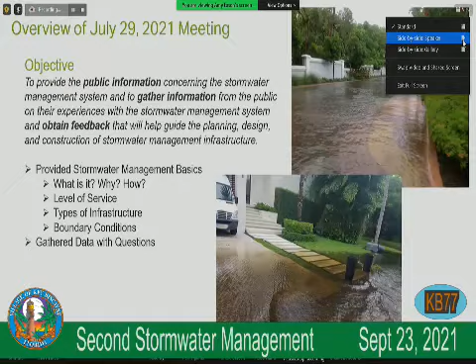He went over an overview of our first meeting, basically held July 29th. It was a public information meeting. We went into what stormwater is, why we're looking at stormwater, and how. We gathered some information from you as part of the survey, and then we obtained that feedback. All this information will help us determine the design criteria moving forward, so the public understands what the level of service is for the system.

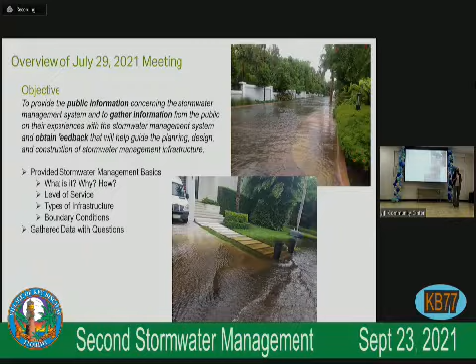There were about 53 attendees at the July 29th meeting. We had 24 via Zoom and 29 in person, and we had 120 people respond to the survey. So that was pretty good.

So today we're going to present those results to you in a way so that you can understand why we asked those questions, how they guide decisions as we move forward with the stormwater system. Then we're going to tell you what that means for the next steps, which Roland already went over.

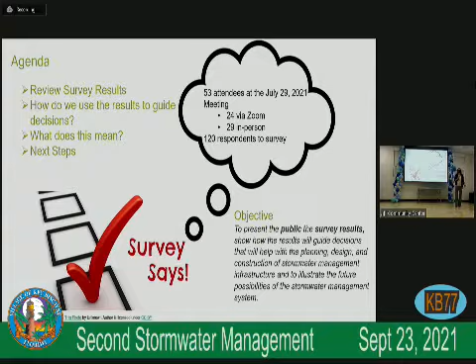The first set of survey questions really dealt with flood tolerance: how often do we see flooding, how high is the flooding, how long does the flooding occur, and what is your tolerance?

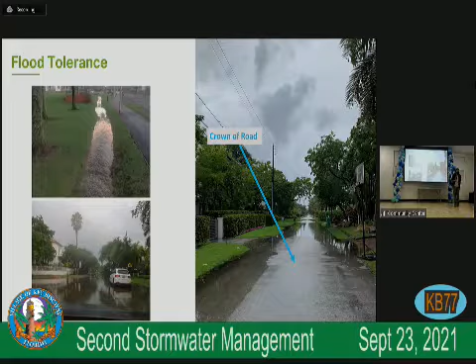The first question was basically, how often does roadway flooding occur or impact your daily routine? The majority said 1 to 10 times a year. About 8% said no impact whatsoever. This helps guide us into understanding the rainfall events that actually impact your system.

The third question is, what's your tolerance for flooding? The majority basically prefer no flooding, but can tolerate some flooding into swales, which is really good guidance for us, because swales, as I tell my other clients, are your friends. They're good for storage, good for water quality, and allow the village to utilize some of that right-of-way to have swales.

The next series of questions had to do with public rights-of-way and private lots. The reason we asked those questions is a lot of the public infrastructure, like stormwater, water, and sewer, are within those right-of-ways, and a lot of residents and property owners don't understand where that line is.

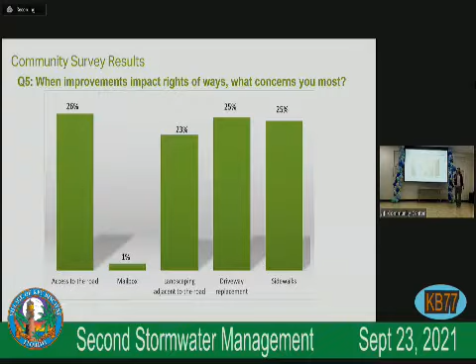The fifth question is, when it comes to improvements that impact the right-of-way, what most concerns you? It's a pretty even playing field—not very many people care about their mailbox, which I thought was interesting. But everything else within the right-of-way, like access to road which helps us with construction, landscaping adjacent to the road, driveway replacement, and sidewalks, matters. We understand that we have to really take into consideration those facilities that are next to properties.

The next question was about upgrading the storm system, and this has more to do with seawalls and what kind of modifications you find most acceptable. The majority are in favor of raising the seawalls when we renew or update those outfalls. The public basically wants to see the seawalls raised, and you'll see in the rest of the questions that seawalls and sea level rise are definitely important.

And this is important to help guide policy, because when outfalls are being repaired, you're going to see this raised seawall right at the outfall, but we have a lot of private side seawall that's going to be adjacent to that. And how do we address those problems?

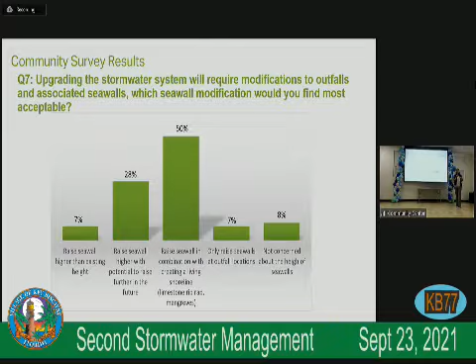Next series of questions has to deal with climate change. So when it comes to climate change, which items concern you most? And the majority is sea level rise.

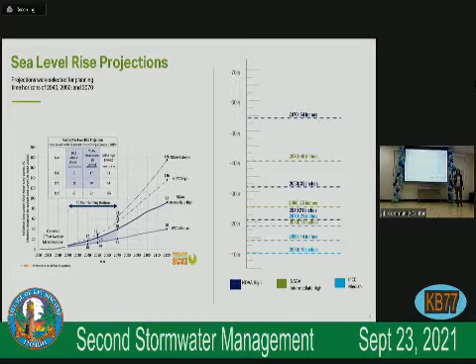And this will lead us to the next question, which has to do with sea level rise projections. Last meeting, we talked about a low projection versus a medium projection and a high projection. And the survey results were basically, let's really look at that medium and high projection as we're planning public infrastructure.

And as we're designing that public infrastructure, we have to consider the life of that public infrastructure. And typically for stormwater, it's 30 years. So we'll take that into consideration as we choose which projection to use, as well as cost. Because if we have to go with a higher projection for design, that's going to increase the cost for the project.

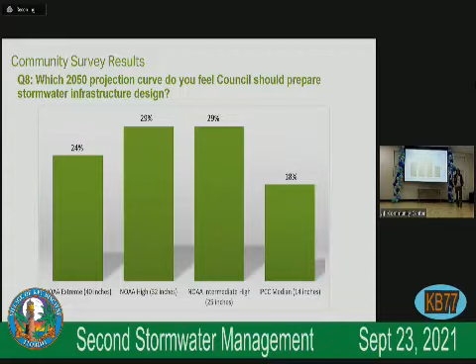All right, so the next series of questions has to do with the public infrastructure and what can we use.

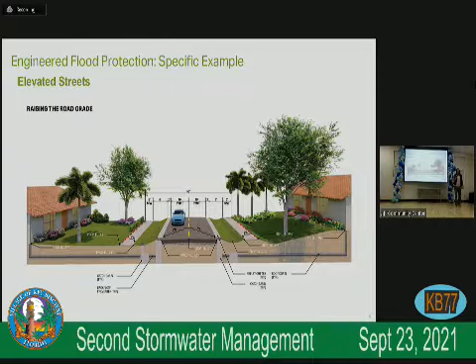So when looking at elevating roadways to address flooding and reduce the number of pump stations, for the majority of you don't really want to see the roads raised, but I would say this is about a flat line. It's almost like 50-50.

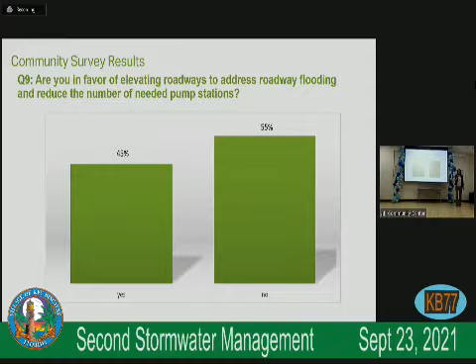And then are you in favor of elevating the roads in combination and making some roadways one way to expand the area for green infrastructure?

Majority says yes. I think we love our green infrastructure. We recognize that we need it for storage. We recognize that we need it for water quality. And a one-way road is an option for us when it comes to design.

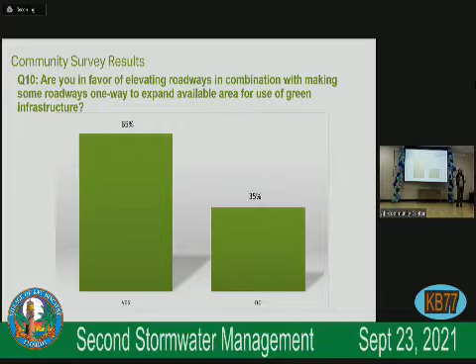And then this question is if elevating the roads occurs adjacent to your property, what are you concerned with? And most of it was property drainage. Yes, when we raise a road, we got to consider how we're going to drain the property.

Another thing that we have to think about is the floor to area ratio when it comes to buildings, because some properties could then play with that, add more storage on site, which then reduces the impact to the system that could potentially reduce the amount of cost in the system.

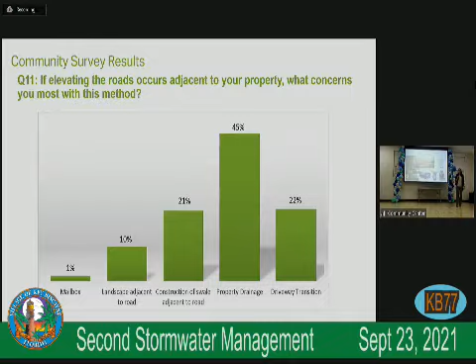Next series of questions is about water quality treatment. We talked about nature-based solutions versus gray solutions. First part is the nature-based solutions. Which one do you prefer? The majority like the rain gardens. They're pretty, they have vegetation in it, they provide storage, they provide water.

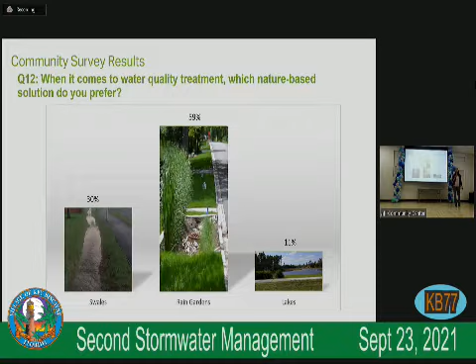When it comes to water quality treatment, are we okay to use gray? The majority says yes. And those, if you remember, are those solutions that are in line with the storm system. So you may see a water quality separator next to a pump station, stay in line. It can also be in with the catch basins.

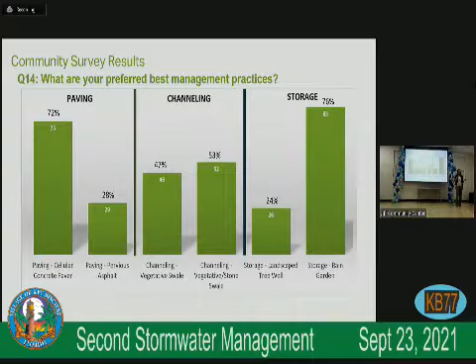And then the last item with the solutions, the green infrastructure solutions, we gave you some selections on paving. The first one was talking about what kind of paving would you prefer. The majority of you like the cellular concrete pavers. When it came to channeling, it's about equal. So we're good with the additional storage, but we prefer the stone.

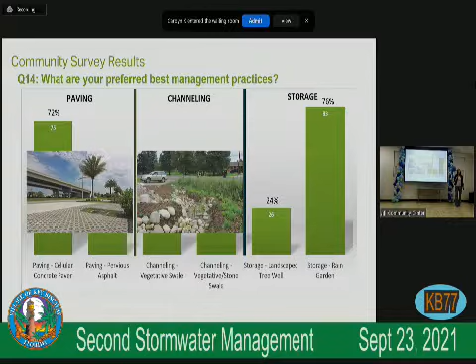And then for storage, again, rain gardens win. 76% like the rain gardens, and so these are items that will guide us into the design decisions.

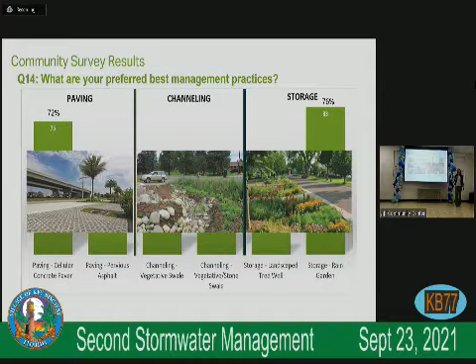And last survey results was what is most important to you, and it's not surprising to see these results. The first one is basically risk to property. That is definitely the majority, and then second up is how are we going to fund it, and then sea level. So right now, I'll take a little pause if anybody's got any questions on the survey results.

Yeah, I think one of the elements that's really important is the funding, because I think people's decisions would be different, since some of the questions don't have the cost basis in them. Maybe nobody wants any flooding, but if that costs $2 billion versus having 4 hours of water that costs whatever $30 million, that's a big difference.

So I guess that may be when council starts looking at the different options. Are you guys going to look at different levels of service and tell us what the difference in price would be if you could see different levels? I don't have enough of that detailed analysis to be able to tell you that.

What I can tell you is, definitely when you go with a higher projection, that's going to increase your cost because you need bigger infrastructure to push against the water that's coming out. So the higher the water, you're going to have to deal with that. Raising roads, although there's a cost to that, there's a benefit that you could reduce the pump station or the bigger size pipes that you may need to build.

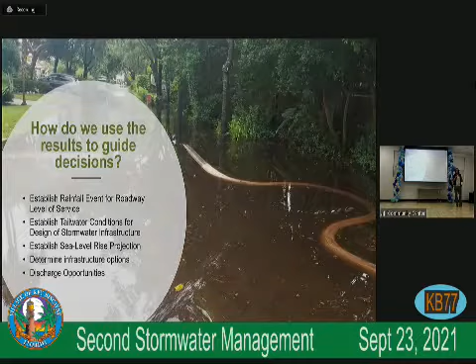All right, the next series of our meeting is to explain how we're going to use these results to help guide decisions. We're going to go over rainfall events with level of service, establishing that tailwater condition, which is the elevation of Biscayne Bay that we want to design our infrastructure to, which then ties into sea level rise, and how much higher we need to design our infrastructure for. Establishing and looking at different infrastructure options, and also a discharge opportunity, looking at where the village's deficits are, where we can improve, and how much more we need to do.

So the first one is establishing rainfall events for roadway level of service. So when I go back to level of service, when a rain event occurs and it's 3 inches, and that road is designed for a 3-inch rainfall in 24 hours, there's no flood. So that's an expected level of service.

So we know that the village gets 55.4 inches a year. Over the past 3 years, the village has been collecting rainfall data, and the maximum daily rainfall they've received is 3.5 inches in a 24-hour period. NOAA said they had about 5.44 inches in the area, so there's a bit of a difference there.

When we were looking at the survey results, we noticed that 55% of the landowners said that it impacts them 1 to 10 times a year, and 64% are mostly concerned about roadway flooding. So for a level of service, we have to look at something the residents and the public understand: the road should not flood during X storm.

When looking at daily rainfall, Miami-Dade County standards and South Florida Water Management require no flooding of the crown of the road - meaning the center line, the highest part - for a 5-year, 24-hour event, which happens to be 6.54 inches. So if the village decides to move forward with that same level of service, consistent with the area, you may entertain that, knowing what kind of rainfall you get during the year.

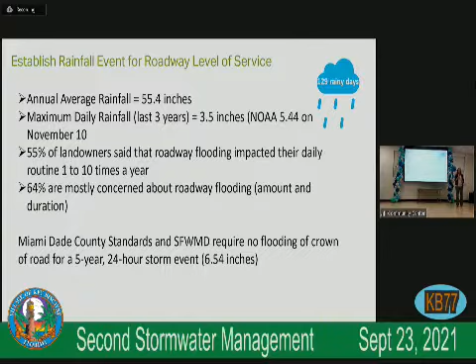The next design criteria is establishing the tailwater condition - what elevation of Biscayne Bay do I need to worry about when designing the stormwater infrastructure? The Southeast Climate Compact recommends a mean high water of 0.15 feet NAVD, and the most recent king tide was 2.18 feet NAVD. Taking the tides and historical information into account, our recommended starting point is 2.07 feet NAVD. You've already put a lot of infrastructure in for tide flex valves to keep that water from coming in, but this gives us the starting point for our design.

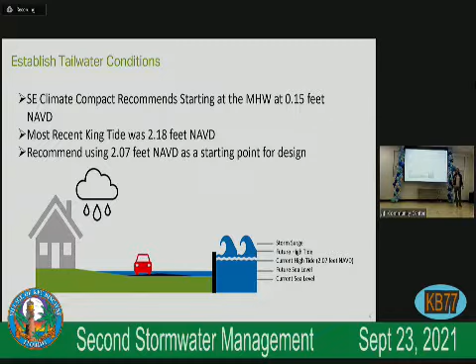Then we have to take into account sea level rise projections on top of that. Looking at the survey results, they're about 50-50 on using the NOAA high versus the NOAA intermediate high - that's 32 inches versus 25 inches, for a 2050 projection. So if we have a 30-year lifespan on our stormwater infrastructure, we would use that projection.

The Southeast Florida Climate Compact recommends using the intermediate high, which is 25 inches in 2050, so we would recommend using the same intermediate high. But if the village decides to go with the higher projection, just keep in mind the cost will increase as we utilize higher projections.

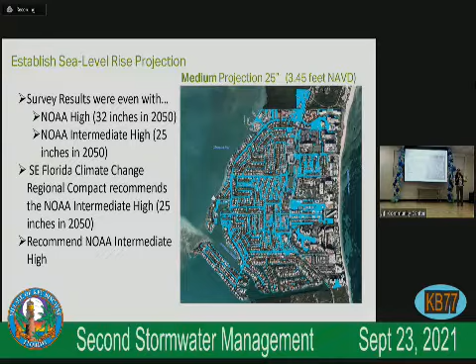The next type of infrastructure to look at is seawalls. When it comes to repairing the seawalls and modifying those outfalls, the majority of you wanted raising the seawall to accommodate the future projections, and also the majority liked the living shoreline. The picture on the bottom is an example of a living shoreline next to a seawall, and the one on top shows the difference of raising the seawall to an appropriate elevation.

Remember that Miami just passed an ordinance to be at 6 feet NAVD, and Miami Beach is at 5.7 feet NAVD. I understand the village is also entertaining looking at raising seawalls.

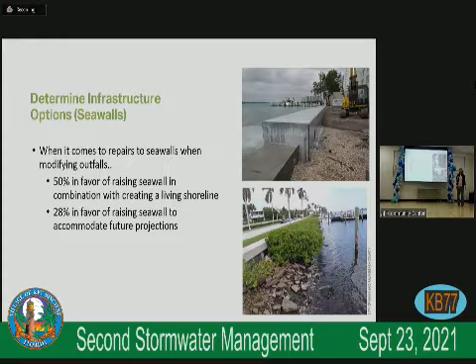We talked about raising roads. We saw there was a slight majority not in favor of raising roads, but you also said if we have to raise roads, we want to utilize it for green infrastructure. When we raise roads, property drainage is an issue, but it's something that can be mitigated - we can go with backflow preventers to the houses, implement more green infrastructure, more storage. There's ways we can make this work, and it helps reduce the cost of the stormwater system if you're able to raise those roads.

Okay, so we're going to pause here. Two questions.

The purpose of the seawall - because the problem we have here is the water percolates from the bottom - so is the purpose of the seawall, since you're raising everything else, the shoreline as high as all the construction that's coming forward, because it's not going to stop any of the water? What is your thinking?

So yeah, there's two things. With the seawalls, if we don't raise them, the whole purpose of doing the stormwater system becomes a moot point, because you're going to have water coming in from the bay. It's going to screw up your piping and catch basins, because there's no way to keep it out. So you have the seawalls coming up. Depending on the ground elevation next to the seawalls, we know groundwater will rise as well, which will diminish some of the storage within the system. So it's definitely something we have to consider when raising a seawall.

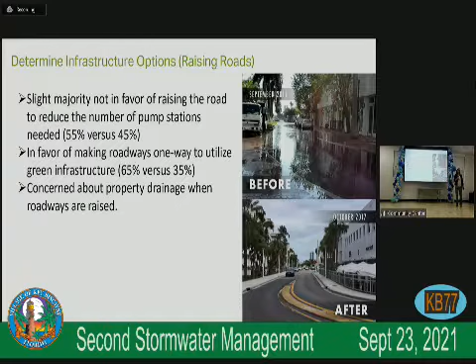Any other questions? All right, the fun part.

Part of our task order is to look at discharge opportunities. That means looking at the existing outfalls the village has, how big those easements are, and what room we have in those easements to put bigger pipes and bigger infrastructure. Then we establish, if I have an existing flow going out, and look at what I could potentially put out, how far am I behind the 8 ball when it comes to level of service. A typical rule of thumb to meet a level of service of no flooding is about 3 CFS discharge, cubic feet per second per acre, for an area.

We've used this in Miami Beach, I've used it in Naples, and actually I did the analysis in Naples and found it needs that 3 CFS, so it's kind of like a check. So we use 3 CFS per acre to meet a level of service of no flooding. Then we determined what the shortfalls were, and proposed what kind of facilities would help get you to where you need to be.

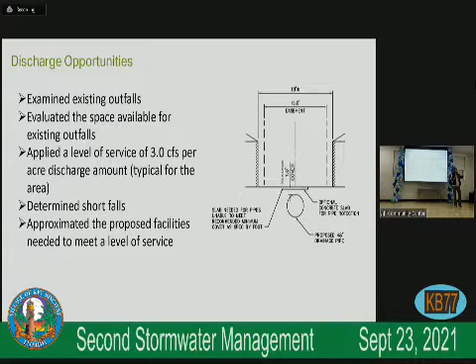Looking at the existing capacity versus the proposed capacity, the basins you have, and the acreage, which is about 800 acres, we found that for existing discharge capacity, with your existing easements and pipe sizes, and taking into account the low elevation to push the water west, you're at about 210 CFS. Using the rounded number of 3 CFS per acre, you would need about 2,380 CFS. So you're already at a deficit of 2,171 CFS, meaning that's how much more infrastructure we'll need to get that water out, whether by increasing pipe sizes or adding pump stations. This is what we came up with for level of service.

So are there any other questions on this? Because this is going to be... yes.

What we're seeking in the future is about, and that's a rule of thumb. Now granted, it's all dependent on the level of service you decide. So if you decide no flooding of roads, that's 3 CFS - I've noticed from experience that 3 CFS handles like a 10-year 24-hour storm. If you decide to do the 5-year 24-hour storm, that's actually 2.5 CFS per acre, so it gives you a little less for the infrastructure, but it depends on level of service. This is just based off a rule of thumb that I use. But if council decides they can do a lesser level of service, that actually helps determine what that is, and the cost.

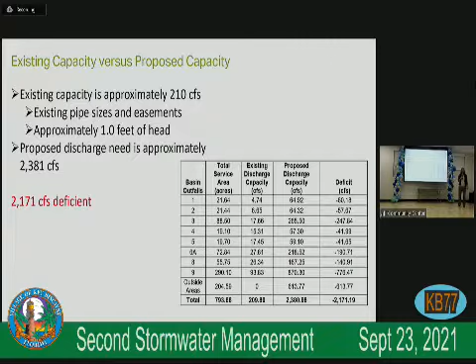Any other questions? All right, that's fine. Is your mind blown? Yeah, pretty blown.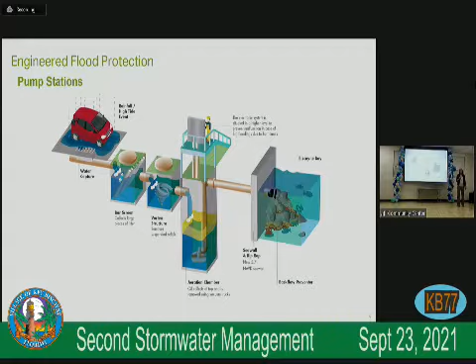All right, so what are some of those solutions that we can use? You've heard me talk about pump stations. Pump stations typically have some sort of water inline gray infrastructure - water quality infrastructure, whether it's a bar screen or a vortex, looking at removing nutrients and removing trash. The pump station pumps into Biscayne Bay because the water elevation is higher. You can consider small pump stations, similar to what the gentleman here was implying. So in Miami Beach, that's Alton Road - that pump station is within the road, has 2 pumps in it. As you can see underneath, there's the electrical panel for the pump station.

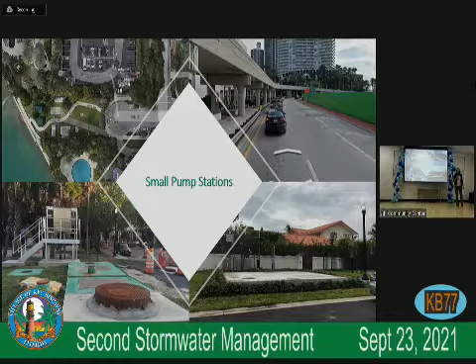And here's another pump station you could have - that's a smaller one. Typically these small pump stations are like a sewer station, so it's a manhole with 2 pumps in it, or 1 pump contained within the manhole. Then you have the water quality structures right prior in line with it. And of course we have to consider with any of these facilities what's called a dissipator box, so we can reduce the speed of the water, so we're not creating turbidity and not eroding the Biscayne Bay or affecting the integrity of the seawalls.

We also looked at large pump stations - this is an example of one as well. You see the big box here, the electric panel, and over to the right you can see how you can hide those things, because a lot of times the public is interested in how you're going to hide that infrastructure so it's not an eyesore. And like I said, they're bigger boxes - they can consist of 4 to 6 pumps, and they have water quality structures as well. And this box may consider using more of the seawall, so we could slow down that energy level.

I know you can't see this, but we took all that information - we looked at the existing discharge. Oh sorry, so we calculated the existing discharge. We looked at...

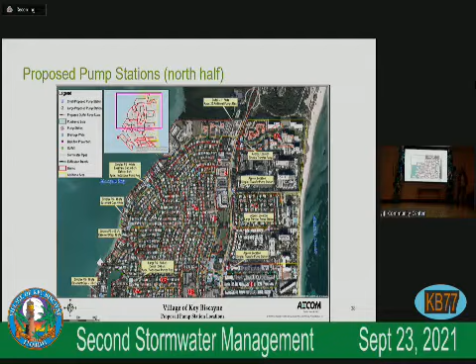How big are those easements? They did range from like 8 feet to 20 feet, I think. And we took a look at those easements and decided, okay, what size pipe can we put in it? Where can we put it? So this is a picture of all the existing outfalls that you guys have that we could utilize for pump stations. We also looked at transfer pump stations, because we're not going to be able to go all from the east to the west, and where we could have those opportunities. And what we found, even doing this - these are assumptions - we're assuming that the pumps can do like 20,000 gallons per minute.

Just making that assumption. Now, depending on the design and all that, we may get more flow, we may get less flow, depending on the location, how much head differential, how much head we have to go through Biscayne Bay. And even doing all this, we came up with, yes, here, there.

Well, now we're at the end of the presentation.

No. So even by looking at your available room, we still found that we were in a deficit. So even doing all these pump stations, we came up with about 800 CFS, actually more, 900 CFS. So we were still at a deficit of about 1,500 CFS. So we would still need to find more room.

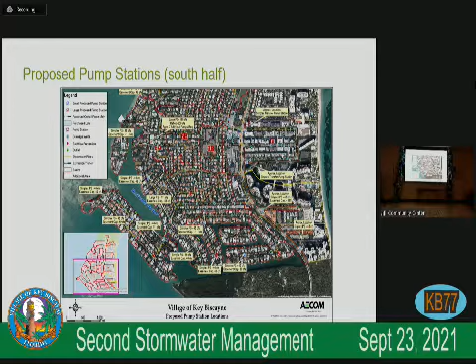Sometimes with a concrete pad, yes.

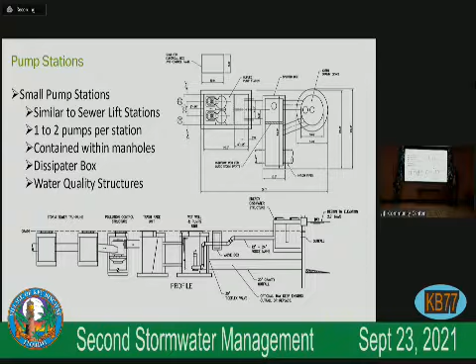I was thinking the same thing on the large pump. I was like, well, we could do a basketball court on that. That was my other thought too. You have to think about safety and all that, but you might get a little double dribble on the lid. You could think about creative stuff, right? Yeah, what could we put on top?

Well, right here, this is an aluminum lid, so that's going to be kind of hard.

You mean like nutrients and stuff? Yeah, well, I believe we should be putting water back in the bay that's cleaner than the water we get off the street. So I think that's something this community will back, and that's something we want to weigh.

Yeah, and a lot of times these Stormceptors are really limited on the amount of flow, so they can only really handle those frequent smaller storms. A larger storm, it's going to be hard to treat that water - there's usually a bypass. There are other ways you could use chemical treatment, you could add alum. There's other ways to look at that, and that's something you're going to have to consider as we do these pump stations.

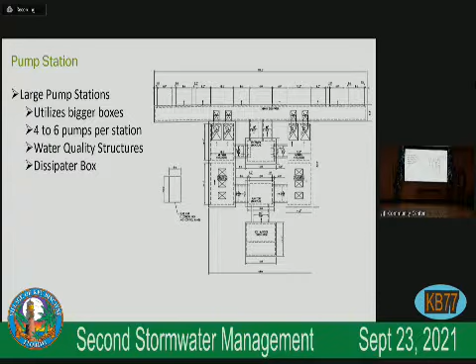We did look, as part of our work order, at injection wells. We recognize that the village has 39 gravity wells that you maintain. They're about 0.7 to 3.3 cubic feet per second, which is very small. Over time, with sea level rise and groundwater also rising, the capacity of these gravity wells will diminish. So we did look at injection wells.

We looked at shallow injection wells and deep injection wells. Even with injection wells, you're still going to have that capacity diminish. You may be able to pump it down, but the capacity will diminish, and then you have the mounding effect, which means you push the water down but it also comes back up because there's not enough room to spread and go out.

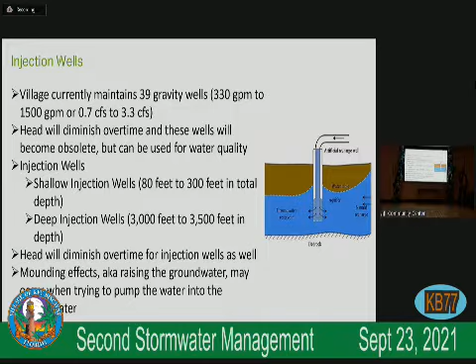The first type of well we looked at were shallow injection wells, usually 80 to 300 feet total depth, with a lifespan of 20 years. Even with a shallow well, you'd have to monitor the effectiveness of the well, and you may have to redevelop or rehab it within 3 to 4 years, depending on how much the groundwater rises.

So if the tide is 3.45 feet NAVD in 2050, the capacity will diminish. And for your information, DEP, the Florida Department of Environmental Protection, doesn't allow shallow injection wells with ground elevations lower than 6.44 feet. The majority of the island is 6.44 feet or below, so you could really only utilize this method in the north part and some of the east part of the village.

The village could explore that for water quality. So if you're looking for another way to gain some water quality, it's something you could explore. But you couldn't really utilize this solution by itself—you'd have to do it in combination.

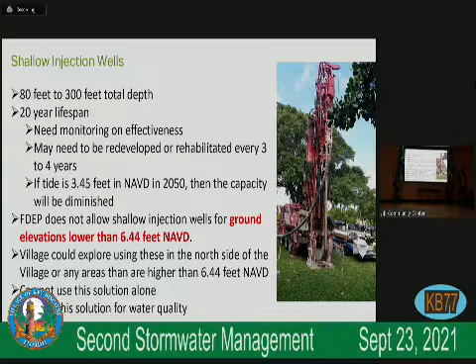Then we looked at deep injection wells. They go from 3,000 to 3,500 feet, with a lifespan of 20 to 25 years. But you're limited to about 42 million gallons per day, which is 65 CFS, and that's with a casing of 36 inches.

A cost for like a 20 MGD well is from 9 to 11 million, and since this price was done a couple of years ago, it's probably a lot higher now with construction and materials. We estimated that if we did this solution alone, we'd need about 37 wells, so up to 407 million—maybe even higher with today's prices.

Based off the current space available within the village, we could only estimate doing 8 wells due to space limits. But it's something you could use in areas where maybe we can't put a pump station or need more water quality. It's a solution, but not a complete solution on its own.

But with the deep injection wells, you have to pump down. You would have to go—yeah, there would be some above-ground pumping apparatus.

But I've seen some where they could put the pump in the manhole and you have to go up deeper. You have to consider any infiltration, but we have to make sure it's watertight, just like any vaults for sewer where you have valves and other stuff—you just have to make it watertight. You could put the pump apparatus in the ground and have it ready, but you'd still have an electric panel.

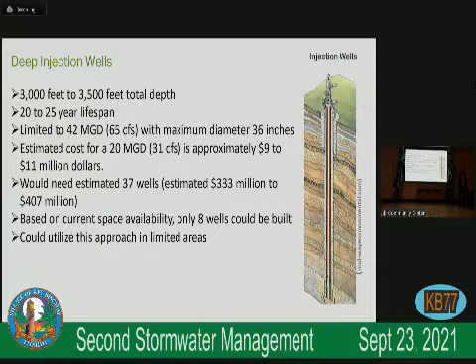All right, any questions on that? So what does this mean for the village?

You're definitely going to have to look at moving from a gravity system to a pump system. You're going to have to expect some upsizing of pipes, pump stations, outfalls. You have to consider raising seawalls, raising roads, implementing green infrastructure. But I think the best way of tackling this is using a combination of methods, not one alone. Looking at the area, assessing it, looking at the elevation, seeing what opportunities are out there for discharge, and doing a combination of methods.

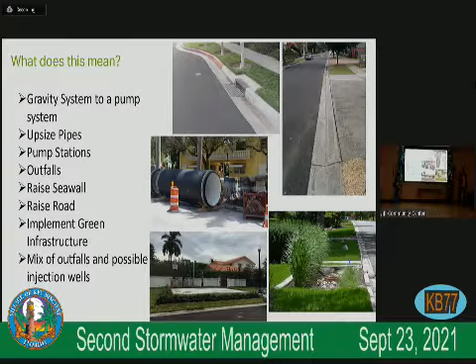So there's been several business cases out there. AECOM just finished one for the 4-county area, Palm Beach, Broward, Miami-Dade, and Monroe. There's a business case that was done in Miami Beach, and there's business cases happening all at once.

When we're thinking about this kind of infrastructure, we've got to think about the return on investment. It's a lot of money that we're going to be putting into it. Things you have to consider: what's the expected annual damages, what's the direct property impacts, what are the business and employment impacts? Because if the road's closed, people can't get to their businesses, they can't get to their properties.

You look at insurance and property valuation, and what are the fiscal impacts? After looking at that do-nothing scenario, you've got to look at the cost of those measures. What does it cost for a pump station? What does it cost for the seawall? What is the O&M for that infrastructure?

Then you really look at the benefits and the costs and what those ratios are. The benefits would be avoiding that disaster loss, insurance and property valuation, and the environmental, social, economic revitalization values. Then looking at those costs, the life cycle costs, including construction, maintenance, and operation over the project lifespan. That all comes to a benefit-cost ratio.

There's been many business cases out there for South Florida. If the community, the village, puts this investment in, you could have a 2-to-1 benefit on your investment—every $1 spent can have $2 of benefit come back from community infrastructure. If people deal with their own personal property and invest in things like exfiltration trenches, cisterns, floodproofing, that could end up being a $4 benefit to $1 investment for private property, not just the community.

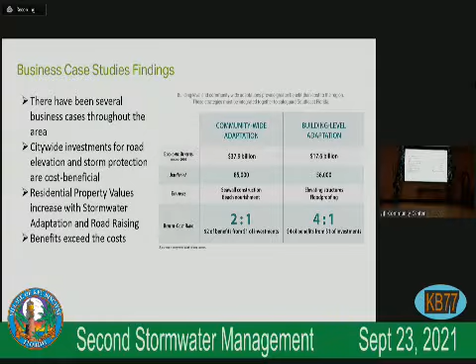We know that village-wide investments, even for road elevation and storm protection, are cost beneficial. We know that when you put this kind of adaptation into play, residential property values will increase when you do the stormwater adaptation and road raising. So the benefits do exceed the cost of this. That's good, and it needs to be done.

So what are the next steps in our process? We're going to present this information, including the survey results, to council, and try to receive some guidance on the design criteria so we can move forward with design criteria packages for the whole village. Then we'll discuss the application of these conditions into the first design criteria package for the K-8 school, and we'll have a third town hall meeting to illustrate how these decisions will be implemented.

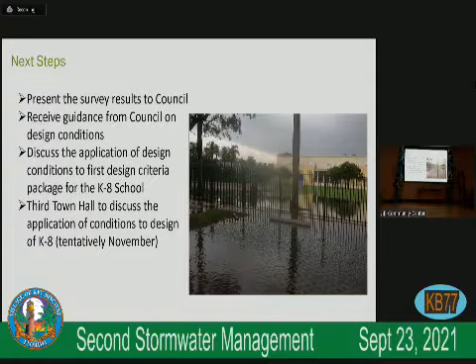And that concludes my presentation. So any questions—I will now sit down and have Roland and Jake take over.

Amy, at this point, if anybody has questions, we want to open it up to discussion and conversation. Steve, I don't know if there's anything in particular you want to say, or Jake.

The reality is this is the hard part of resiliency. We have this goal of doing resiliency on Key Biscayne—this is what it means. It's going to take a while. It's going to require a lot of adapting to construction over the next 10, 15 years, and there are definitely going to be cost implications to doing resiliency.

Part of the reason our resiliency program has been structured the way it is is because it's being driven by the modifications we absolutely need to make to the stormwater system, which then drives a whole host of other infrastructure adaptations, like what do we do to the roadways? And while we're dealing with the roadways, what do we do with the utilities—do we put the utilities in the ground at the same time? So it's a very complicated process that we're working with the manager and Jake on to figure out how to sequence and integrate all these lines of effort.